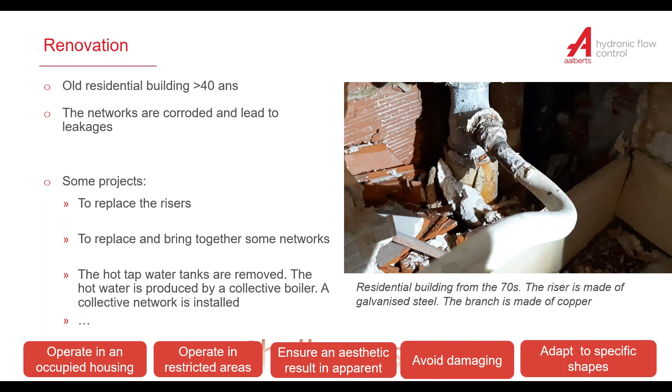Let's move on to the new building. Today we need to build faster and faster, and we absolutely need to keep or improve our productivity. On the construction sites, we have to limit the waste of time, to adapt to the complexity of installation, to deal with delays, to deal with risky situations. Thefts must be avoided, and currently human contacts must also be avoided.

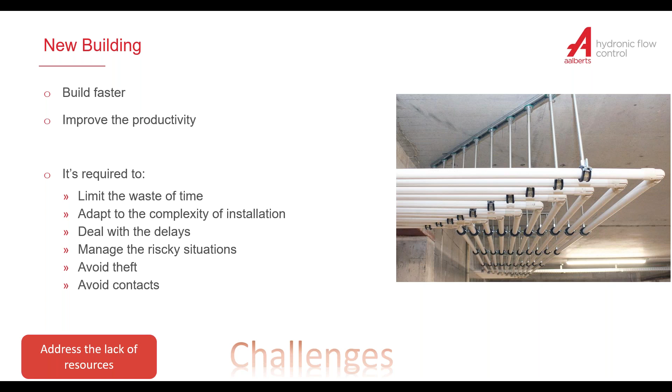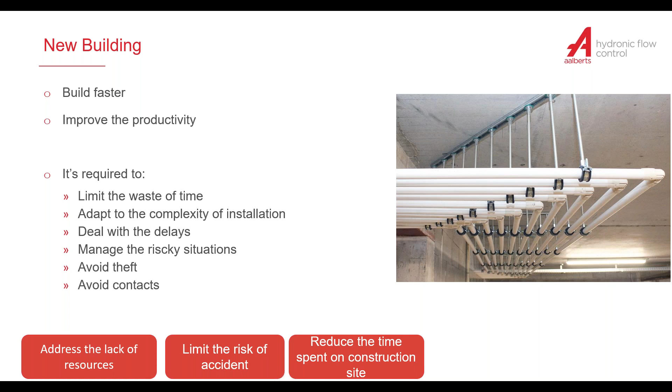Here too, you have to face some challenges. To address the lack of resources: indeed, to find skilled workers is not so easy. Accidents must be avoided, of course; to ensure the worker safety is essential. The time spent on the construction site must be limited, and the time to assemble in the workshop must also be reduced. The tool maintenance and the tool management must be made easier, and of course, it's essential to improve the competitiveness. The solution for both renovation and new building is the Multiskin.

And in the Multiskin product line, the solution is the push fitting. The Multiskin line is two solutions of pipe, the Multiskin 4 and the Multiskin 2. In the Multiskin 4, there is a high thickness of aluminium. It makes the product suitable for the apparent network and for the risers. The Multiskin 2 has a lower thickness of aluminium. As a result, it's perfect for the non-visible network, behind the wall, for example.

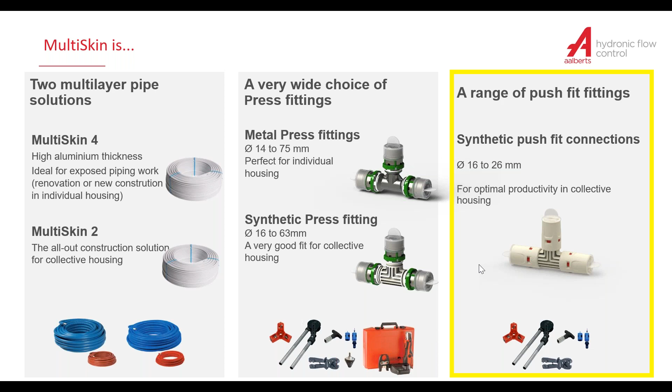Regarding the press fittings, there is the metallic press fitting and the synthetic press fitting. And there is another type of fitting, the push fitting, that I'm going to describe now. The push fitting will address all the challenges we have just talked about. The push fitting is a concentrate of technology. It has been developed for the professionals and only for professionals.

It's an instant solution. The pipe has just to be inserted into the fitting. No tool is required except the tool to calibrate the pipe, and that is very important. The pipe calibration is important. It's compact and massive. It's a robust product, and it's also aesthetic thanks to its finishes and its cream color that fits well with the white color of the pipe.

It's a non-demountable fitting. It's also rotative, which is very convenient when assembling. In addition, you can see some prints here, which allow a better grip in hand. And you can also see the visu control in red. The visu control allows you to know if the pipe is properly inserted or not. The benefit for you here is an easy installation and an aesthetic result.

The push fitting is also the best choice regarding the hydraulic properties. Indeed, the cannula is built with an inverted aircraft wing-shaped profile in order to improve the venturi effect. That means to get a higher velocity across the fitting. This fitting leads to less pressure loss and a higher Kv value.

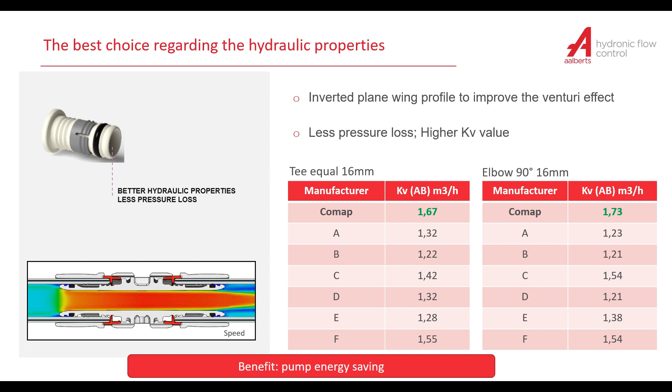Robustness and aesthetic. The fitting was designed by a designer. The reinforcing lines recall the water flow, and the reinforcing lines also give an aesthetic result. Thanks to these lines, the material thickness is more important when it's required to improve the bending resistance. In addition, the fitting is made of high-quality materials.

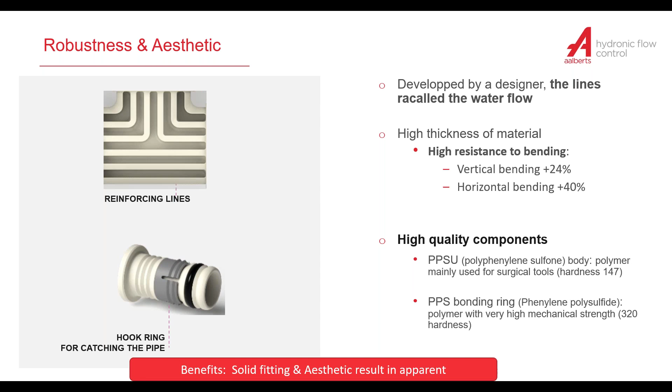PPSU for the body. The PPSU is commonly used to make surgical tools. And the hook ring is made of PPS. The PPS has a high mechanical strength. The purpose is to provide a solid product that also gives an aesthetic result in apparent.

The connection only takes a few seconds. This is the quickest way to connect a pipe and a fitting. Regarding the productivity, this is the best way to improve it. The push fitting was developed for professionals. It provides you the COMAP guarantee and the COMAP know-how.

Don't forget, there are some best practices to follow to calibrate the pipe. Indeed, the calibration has to be done with the COMAP calibrating tools. It's mandatory. With this solution, COMAP brings you an important time saving when installing.

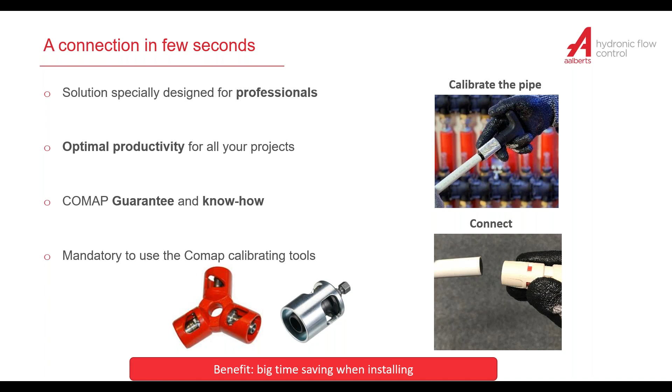Protection and safety. First, the visu control. The color is red and switches to white when the pipe is properly inserted into the fitting. This is a guarantee of success. You can be confident in the result. There is no way to forget one connection and there is no way to do it badly.

Regarding the traceability, our process involves the marking and the tracing of all the fittings. The protection cap ensures that the fittings remain clean, for example, when the fittings are on the ground before being installed. All these elements contribute to a successful connection and ensure the result.

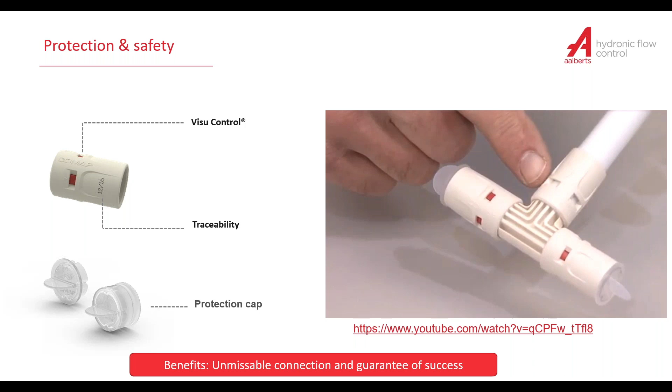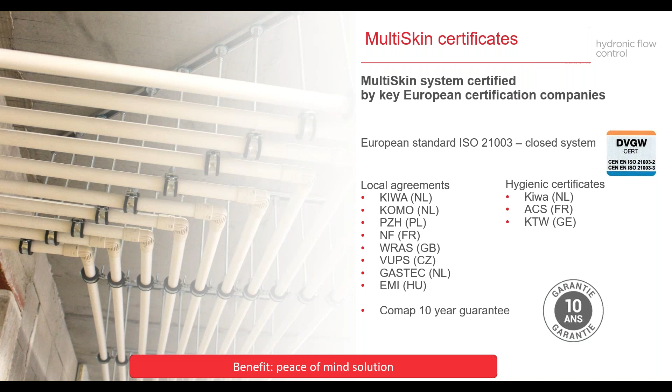The push fitting is certified like all the MultiSkin range of pipes and fittings. It's in line with the European standard and with local agreements. It can also be used for drinkable water. COMAP also guarantees the push fitting 10 years. It's a reliable product and it's a peace of mind solution.

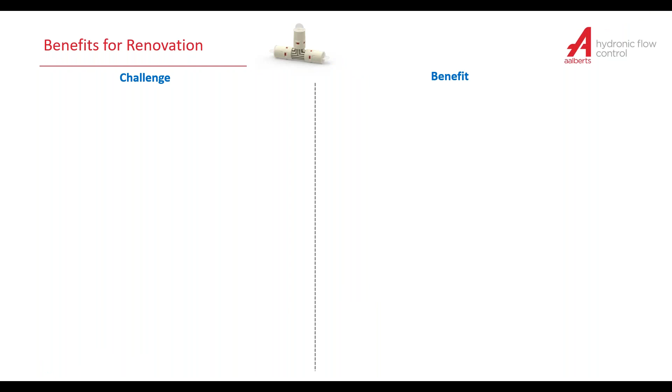I bring you back now to the two applications, renovation and new building. We talked about challenges. Let's see how the push fitting can address every challenge. First, the renovation. Operate in restricted areas. As there is no need of tool, the access is easier with the push fitting.

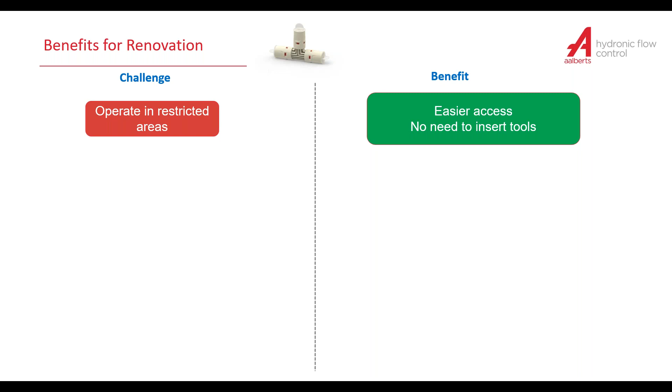Operate in an occupied housing. The connection takes a few seconds. It's quicker than the soldering or crimping technologies. It's ideal in order not to disturb the occupants for a long time.

Avoid damaging the worksite environment. There is no tool, there is no flame, so there is no risk of damage. Ensure an aesthetic result. The color is white, it's aesthetic, there is no need of painting.

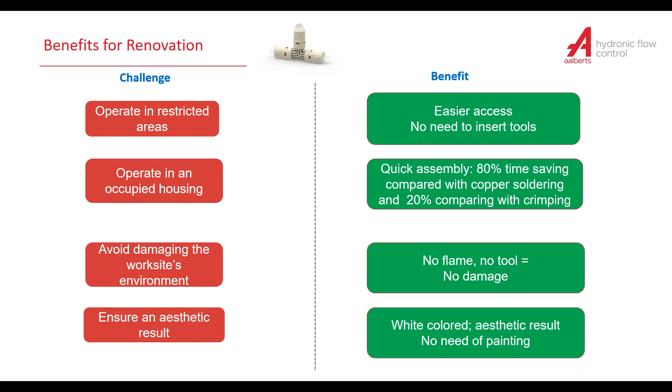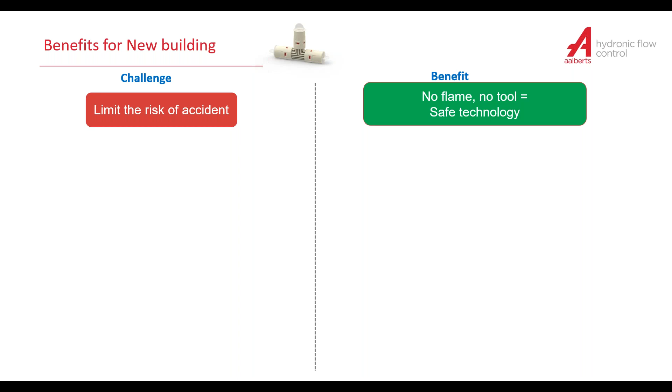The new building now. Limit the risk of accident. As we said, there is no tool, no flame, it's a safe technology. Make the tool management easy. There is only a calibrating tool, so it's easier.

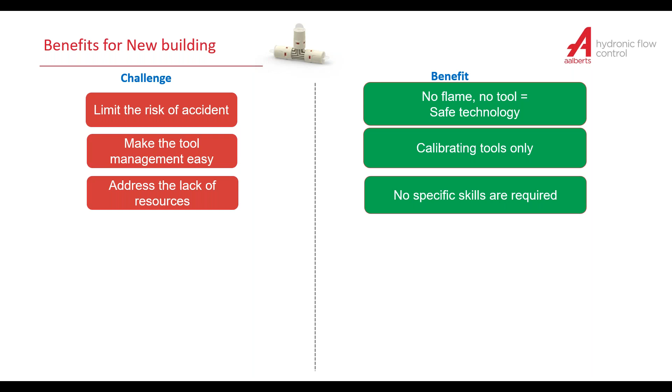Address the lack of resources. No specific skills are required, so it's easy to train people with the push technology. Time saving. The push technology is the quickest way to make the connection, so it's time saving.

Select reliable and efficient products. The push fitting is certified like all the Multiskin line. And avoid theft. There is no metallic part inside. There is less risk of theft.

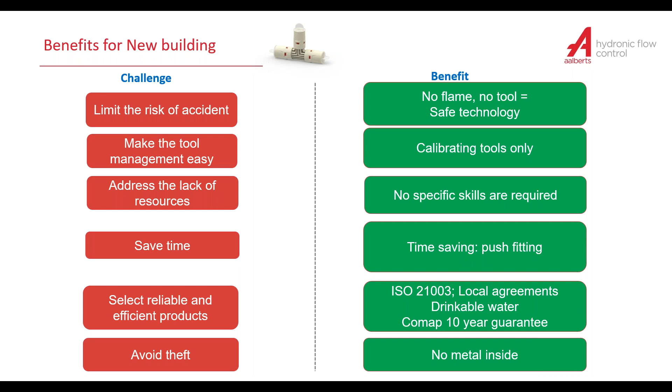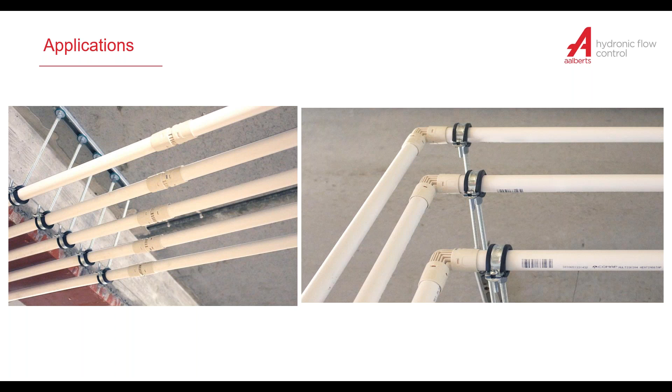To end this presentation, some pictures now about a new network made of Multiskin pipes and push fittings. As you can see, the result is aesthetic and the installation is clean. And the result is very professional.